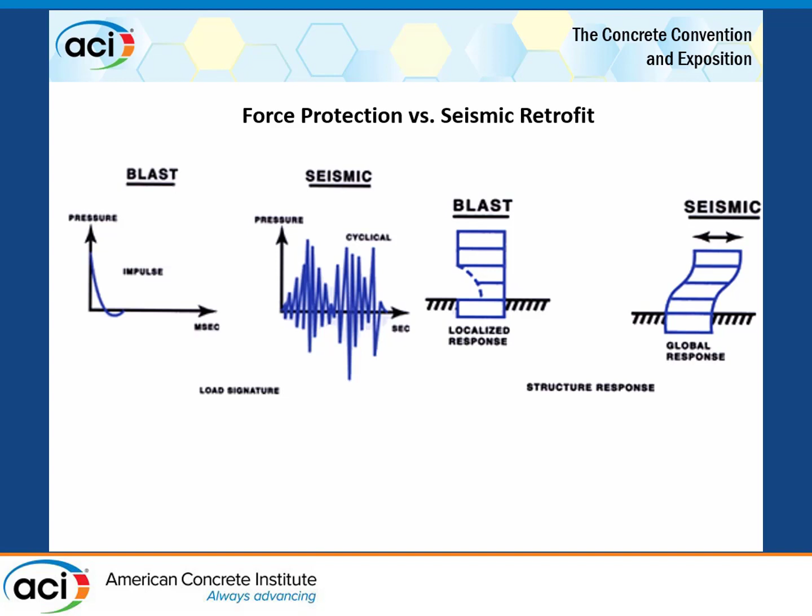What I've found over the years is that there's a fundamental misunderstanding still to this day of what the materials are. People have moved past and started talking about how to design them for shear and flexure and call them confinement, and I can talk about that till I'm blue in the face. But at the end of the day, there's still a real misunderstanding of what these materials are and how they behave with reinforced concrete or wood or steel or anything for that matter.

So as we've worked through the field of blast, we've dealt with all of these types of things, and what happens here is I have sometimes academia, but usually it's a consulting engineering firm, ring us up and ask, will this material provide a solution to my structural problem? And we have to talk about that. We have to talk about what exactly is the structural problem, and talk about what are your alternates.

At the end of the day, this industry doesn't exist unless you save people time and money. So I have to be able to show people, first, that we can solve the structural problem, and then second, that it's going to save them time and money compared to what they would have done, because there's more than one way to skin a cat. And at the end of the day, that's the name of the game. It's saving time and money. It's not research, no offense. It's saving people time and money.

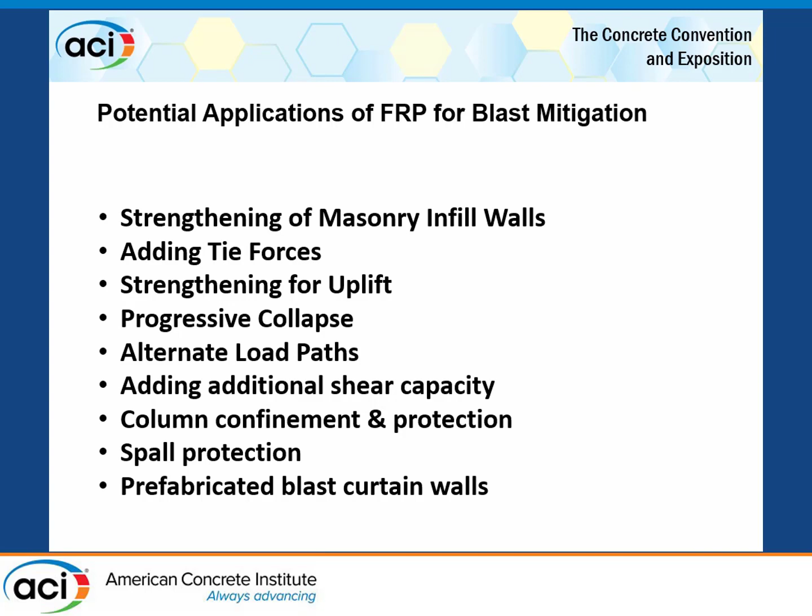So I have to take what's done in the laboratory and find practical purposes and bring those solutions to these clients who have owners that have to save time and money. By the way, I'm not going to read to people, it's just something I don't do.

So what I want to do is show just a quick comparison. This is actually just a comparative shake table test.

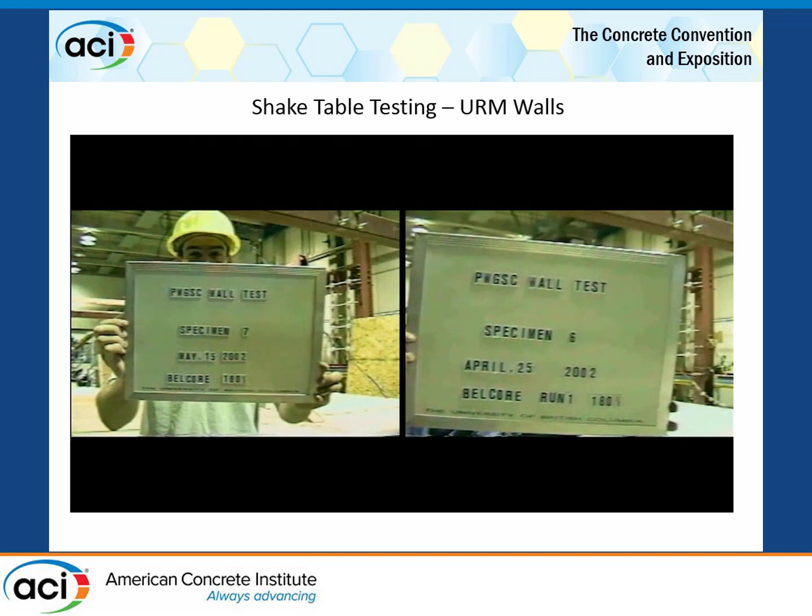This test was done a while ago, and it's very dramatic what these materials can do to a structure. Showing that to people gets them really excited.

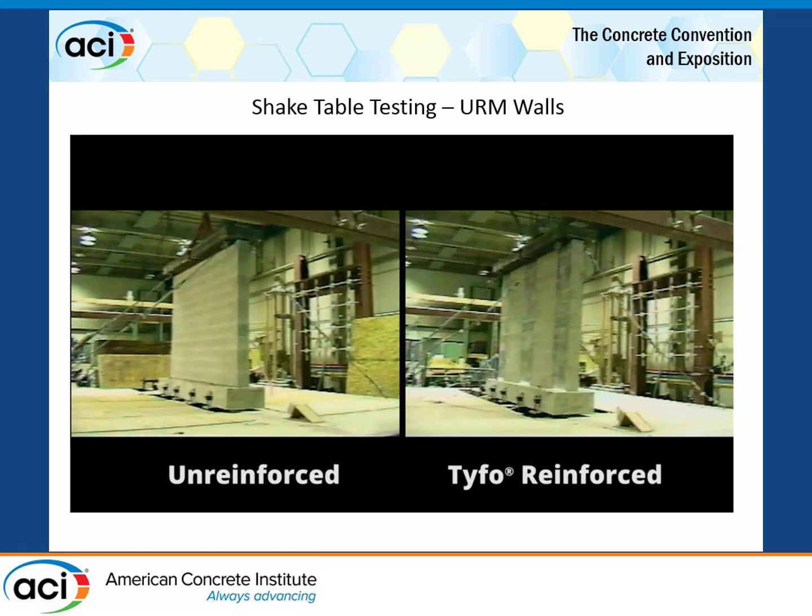This is an unreinforced, ungrouted CMU block wall with a mast that, thank God, is hooked to an overhead crane above—otherwise it would be a real problem on the shake table. Next to it is the exact same excitation event being hit on the table.

All we have here is one layer of glass. It doesn't even cover the entire face of the wall, and then we have glass anchors going into the foundation. Still, just a remarkable difference in the performance, and for very little cost.

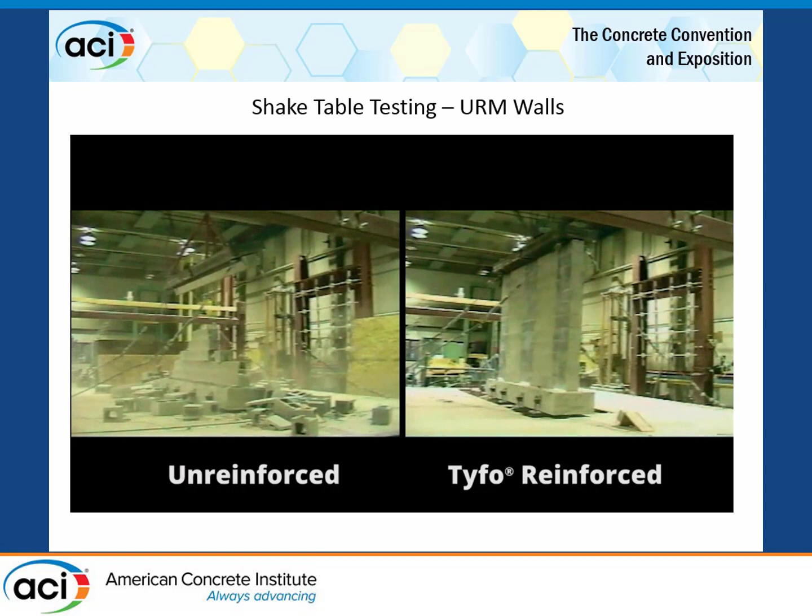For most of the time with blast, we've seen that these glass systems will tend to outperform the carbon system. Again, a lot of this you've probably already seen.

This is a test we did with BakerRisk back in the day. The glass is on here—I get a lot of confusion with that. You can see the grout lines behind the glass material. Glass is somewhat translucent when you saturate it, but it's there. You just got to trust me.

It's 2 layers of unidirectional glass, just spanning vertically, simply supported at the top and bottom. What you don't want to do is catch all that load and shove all that load right into your connections—the stiffer element you put on that wall, the more you'll do that.

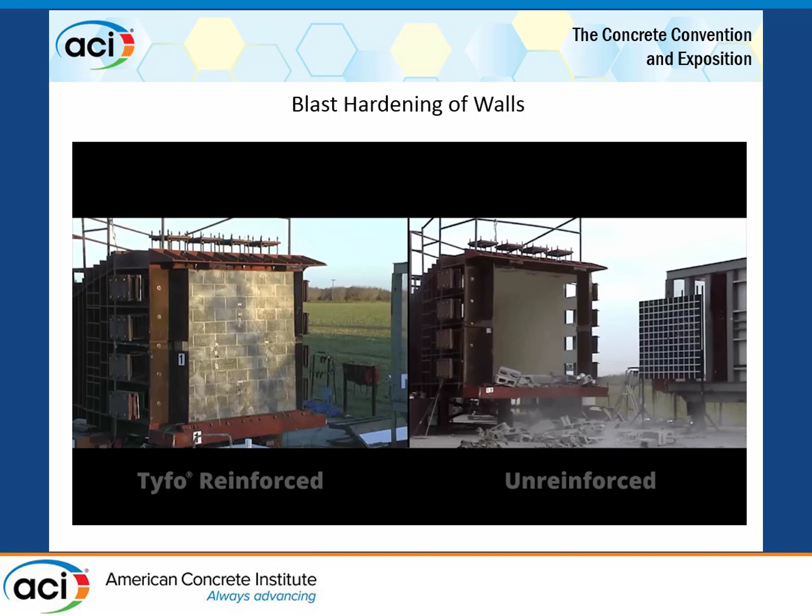By using the glass and its 2% ultimate elongation, you can spread more of the plasticity through the member and send less of that load to the joints. You don't want your joints to fail—it's a very bad day, as Zach was referencing.

When we had done some of these tests, we played with different amounts of coverage. So if you don't cover the whole wall, there's a danger of small pieces flying out and hitting somebody.

So although you may save some money by not covering the entire surface of the tension face of the wall, obviously you want to prevent small pieces from flying and hitting people. So we tended to go with full coverage. I just thought I'd show you that.

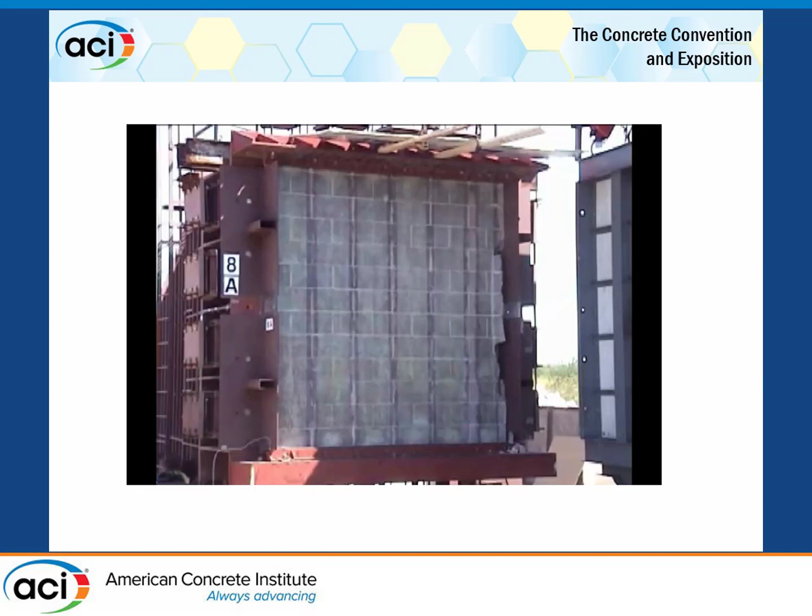Before I get into this—because polyurea has quite a bit higher elongation, it's not FRP, I also wouldn't suggest using it—I want to talk about elongation.

We use glass sometimes in blast events because its ultimate elongation is roughly 2%. By the way, that's true of everyone's glass, everybody's products. You should consider GFRP as having an ultimate of roughly 2%—it'll fracture. Same is true of carbon, except it's roughly 1%. So everyone's carbon, I don't care whose it is, product X, Y, and Z, 1% is the ultimate elongation.

I see a lot of confusion on this. There are people who talk about 1.8, getting close to 2%—they're talking about the dry fabric. You cannot do that with this material. Aerospace knows it, and yet we're screwing around with this all the time.

I see confusion all the time. When I talk about not understanding the materials, I'm talking about people citing dry properties, like 33,000 KSI modulus—okay, that's not this, that's not what's out there doing the work. That's this: close to 2% elongation. That's not this, that's not what's out in the field, that's this. And oh, by the way, your concrete and steel is trashed when you're getting that high anyway.

So when I talk to engineers about how you design FRP going into the world—I don't care whether it's blast, a seismic event, whatever it is—it's strain compatibility. That's what it is. You need to know strain compatibility with the reinforced concrete, the wood, the steel, the masonry, whatever it is you're putting it on and working with. You have to understand that.

And if you think this material has close to 2% elongation, you're wrong—that's a carbon system, it's 1%. People mess around with this all the time because you can tweak the equations that spit out results when you follow some of these guidelines that have been created. I'm not a huge fan, because the guidelines have to improve.

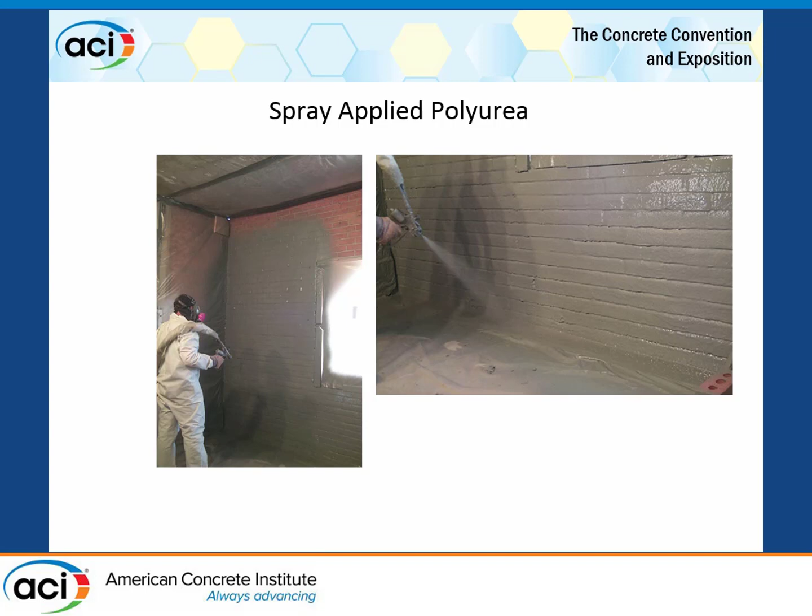Polyurea sounded good, very high elongation, pretty awesome stuff. You can put it on walls, and it looks great—right up until you try and install it. You realize about 20 to 25% debonding should be expected with almost all polyurea applications. 20 to 25% of the area you should go ahead and assume you didn't install it right, didn't debond, or didn't bond properly to the substrate.

And it's hard to get it on right. It's hard to get it on at the right thickness. It drips. It's really hard to control.

And then we kept getting these questions about fire, so we went ahead and did an E84 test, and we almost blew up the lab. Turns out polyurea at the right temperature is the opposite of safe, so I don't suggest it. We don't sell it anymore.

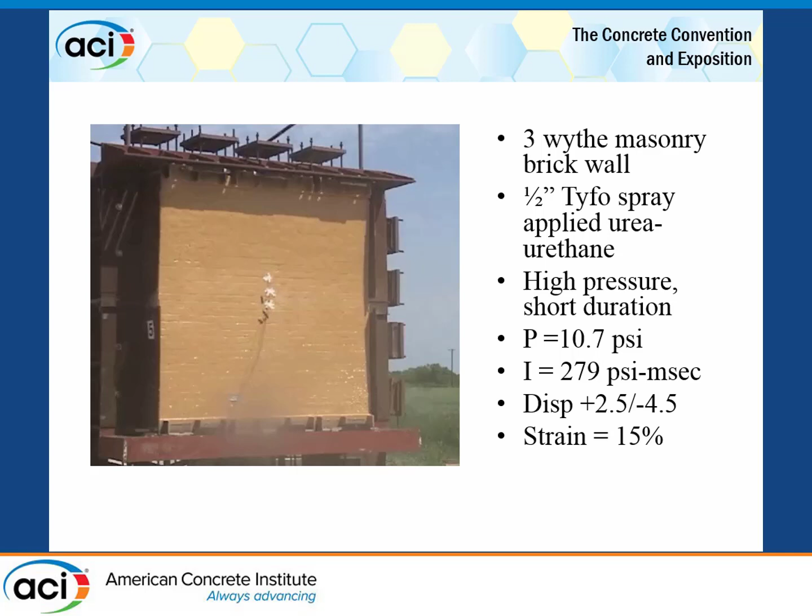Saw this slide earlier. I just like the tyforce method because when people start talking about it, the retrofit looks exactly the same. It's super simple. I like it. When can you use it? When can you not use it? That's on you, I don't care. It's the UFC. Study it.

What I want from the designer, I need a design engineer to be very clear about two things: the capacity of the element and the new load demand, and the dimensions of it. You're liable, as the engineer of record, for those things—the capacity of that thing, the new demand from whatever the blast event was, and the geometry of it. That's all on you. At the end of the day, we at Fyfe, and through our applicators, our certified applicators, are then liable to pick up the difference, which we help them clearly define on the bid documents.

What I don't like is that through this misunderstanding, fundamentally, of the materials to start with, and then how they're used, I see bid documents at the streets that are very apples and oranges. My job over the 25 some odd years has been basically trying to get these bid documents to be apples to apples. I think all of us as engineers would agree that when it hits the streets, it should just be apples to apples. And getting that to be true is very difficult.

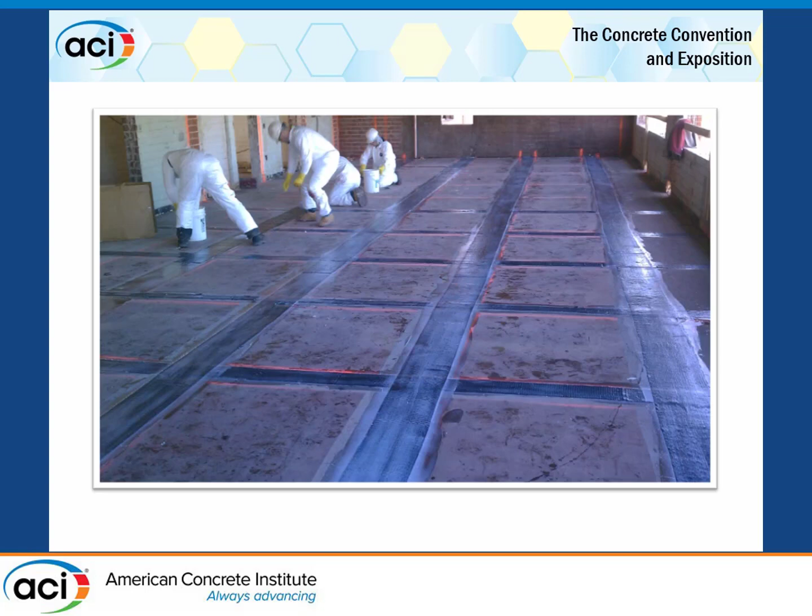I want 50 kips of tension in that element and design it for ACI 440—okay, that's apples and oranges. It's not the same. And I can show you the gray areas, but it takes a little time.

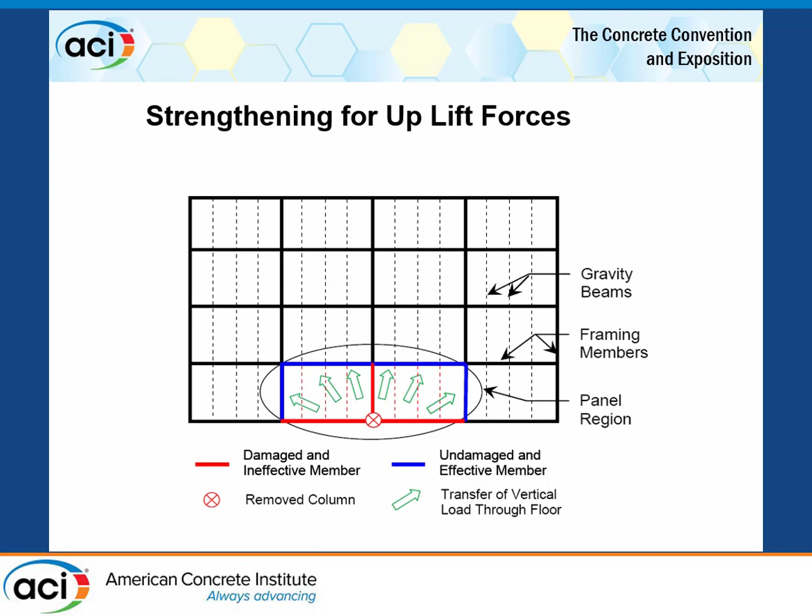You've seen some of these. Sarah, thank you for the work. This was actually originally with UT Austin, I think, we started, and then In-Sung Kim picked it up, and Wassim Ghannoum picked it up, and I don't know if Jim Jirsa is around here—I saw him, but he was retiring, so I don't think he came out. But early on, working at UT Austin, we learned a lot.

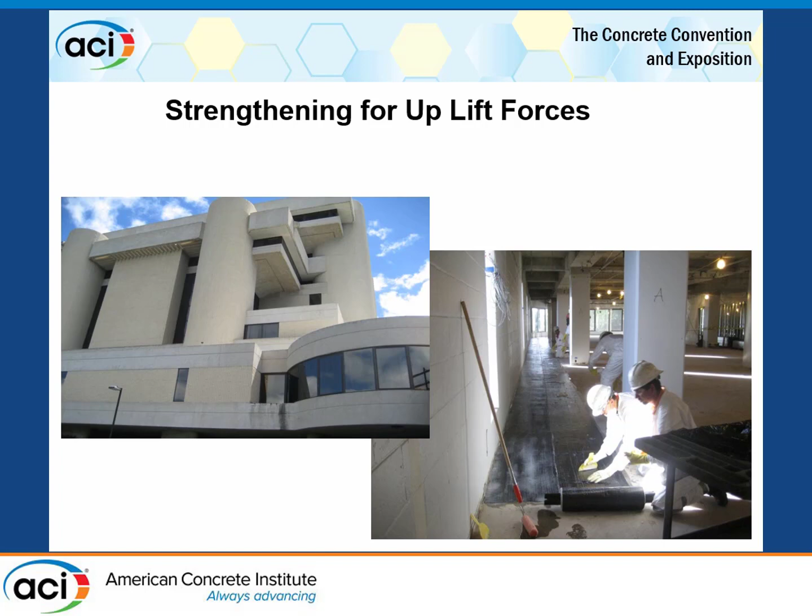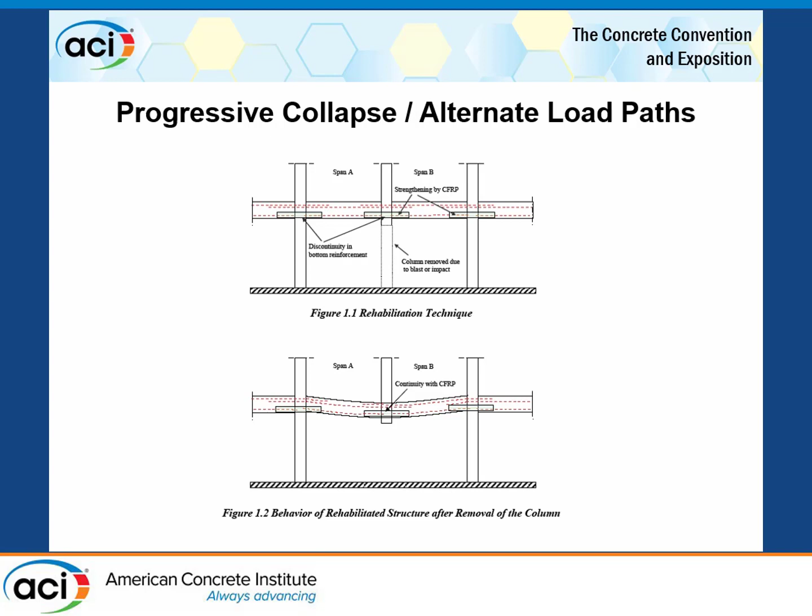In practice, this is one of the projects we did. It's a courthouse out in Oahu, and the problem here is discontinuous top steel in the slab, basically, and we're just creating that continuity. What we see here, and from Dr. Orton's early testing, was that when you have discontinuity, whether it's in your bottom steel or in some cases your top steel, creating that continuity through the use of these materials can be doable.

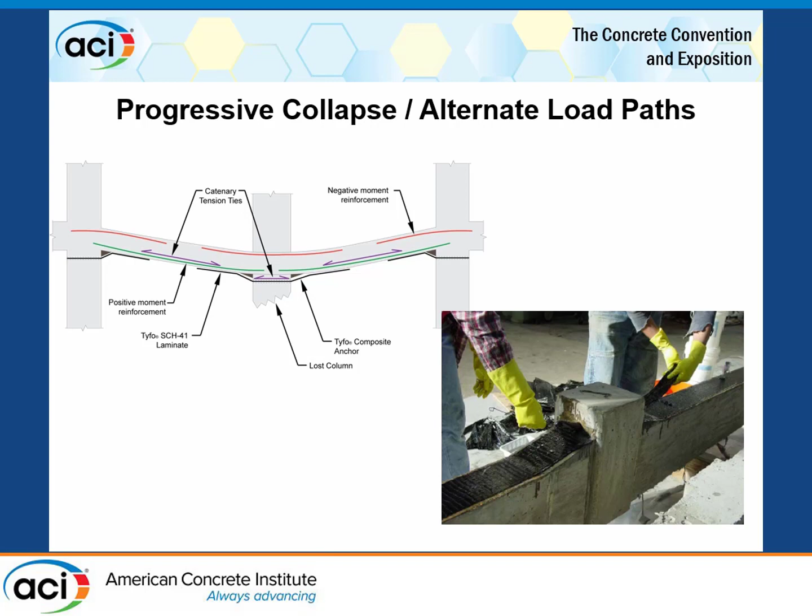What we find is the geometry is a pain in the butt. You see here, it's a small scale specimen, and we're drilling through and sending anchors through. Very tricky, the geometry of how that joint is formed in the road, getting to it and getting access, and really making this work can be quite complex. Quite honestly, a lot of times when we've seen things like this, we've had to suggest they take a different method, use reinforced concrete or steel or something else. You have to make sure that the mechanics work.

I don't know if Austin showed this yesterday—I wasn't able to make his talk. This is at UT Austin, very interesting testing that was done. If you bond three-sided to a beam for shear, the mode of failure will be debonding. The question is, when does it debond? So you grab your 440, you go through your K factors, you figure out what the debond stress is going to be.

All right, I'll ask you this: did they prep the concrete the same there as they did there? Is the concrete property the same there as it is there? Have you ever been to Quebec and seen the concrete?

How confident are you in that debonding strain that you empirically came up with? That will almost always govern what this can do. However, this did not fail by debonding. So look a little closer. This failed at ultimate - the carbon's fractured.

What actually happened was when you read the dilation strains, with a load there and the support there, you get a dilation strain of roughly 0.004, 0.005, 0.006, and that shear crack gets just wide enough that you lose your aggregate interlock. You lose your V sub C component, and it goes from 0.006, boom, to 0.01, and bam, it breaks, and it debonds very fast.

So really, I would argue the ultimate here to design would be about 0.006 based on the crack width, essentially, and that's true of columns as well.

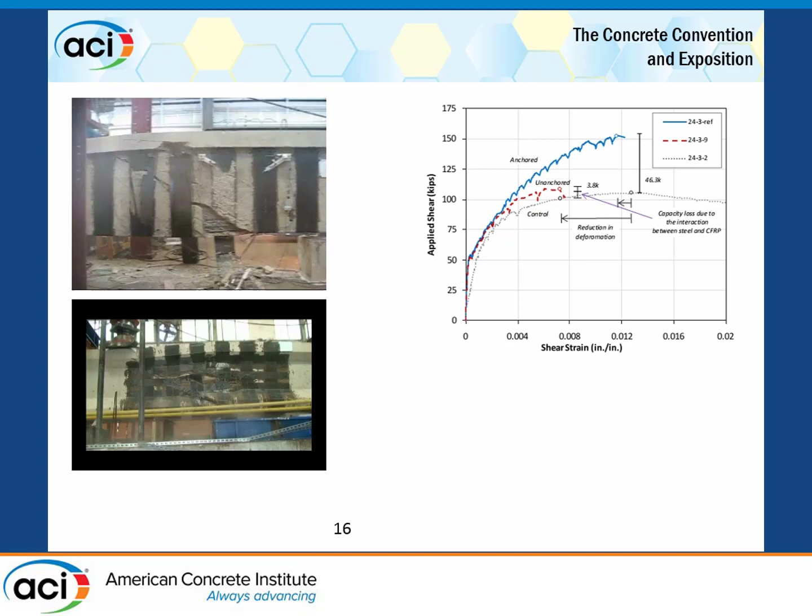What I can tell you is through this testing, I can now remove debonding as a mode of failure. If I'm allowed to design it the way we want, based on the testing that we've done, debonding will not be your governing mode of failure. We can literally remove it.

This was completely debonded on purpose. The only thing we had is a three-sided and then fully anchored, and we actually performed much better than I expected. I would still, by the way, suggest that you can treat it as a bond-critical application and still bond it, but we wanted - this is fun to do in a lab - to completely debond it.

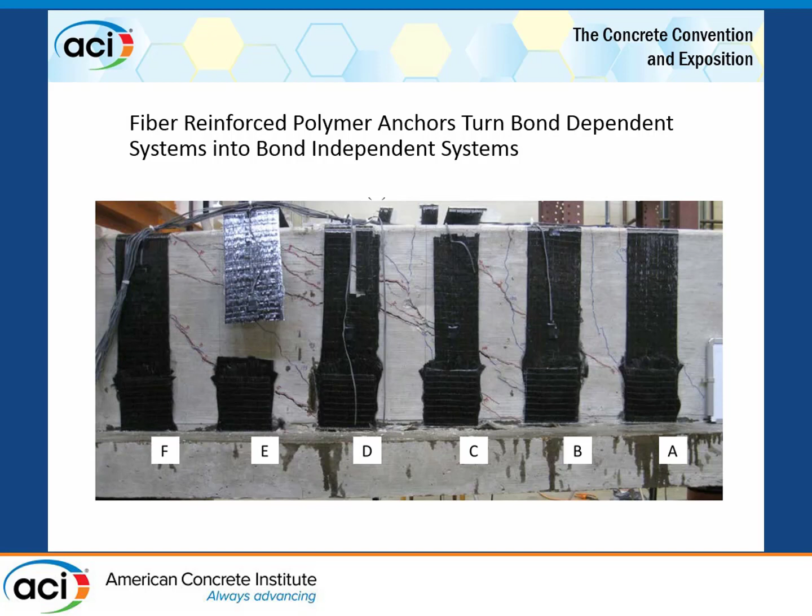I wouldn't necessarily suggest that at this point in time in the real world. But we did prove, in fact, that you can take debonding out as your governing strain, as long as you detail it correctly. And that's a longer conversation.

You can improve the performance of walls. We did quite a bit more wall testing with and without anchors. The detail you see there with the beam is more or less what we tested at UT Austin.

Whether you go straight in or whether you angle it, six for one, half dozen for the other - but in terms of where you drill the hole, you can't drill the hole all the way up against the soffit if you go straight in because of the dimensions of a drill. You're going to end up 1.5 or 2 inches below the soffit. But if you slightly angle that, you can get the hole right up at the top, closer to the compression zone. I'm trying to get my tension member up into the compression zone.

It's very similar to struts and ties and what we already learned about, right? And this can substantially improve things. Basically, you can start designing these, if you can justify it through your tests and what you've done, the same way you would design a fully confined column.

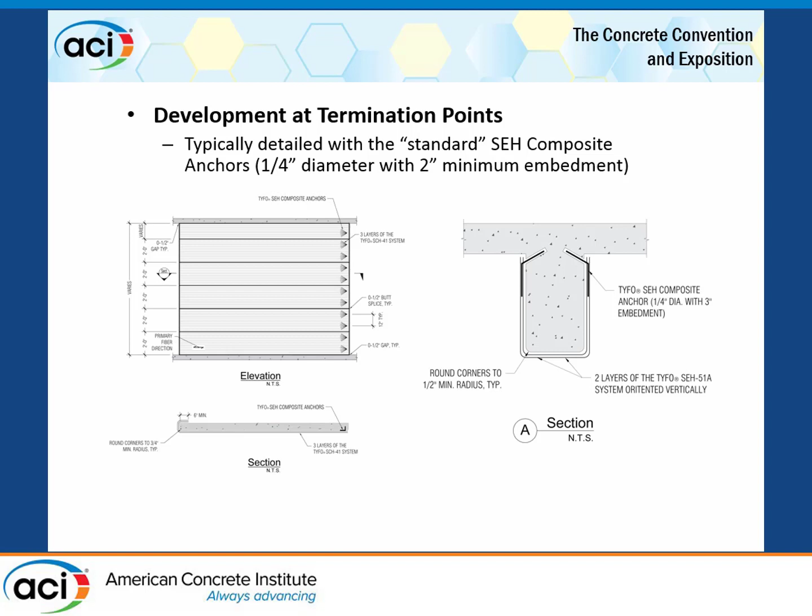We've also run anchors right through the slab and all the way around and done some different details with that. This is one of the tests that we've done - notice we are using glass. It's kind of neither here nor there.

But the idea, and I get the question a lot, is when do you use glass and when do you use carbon? You need to achieve a performance goal, and you need to do it at the least possible cost.

So it gets back to when to use glass and when to use carbon. Check it, run the numbers for both, go to your contractor, talk about it, figure out what's involved. And guess what? The glass might actually be less expensive, and you might not need carbon. This is an example of that.

I just want to show you how our anchors are installed. There's some differences in this concept, but again, the hole is drilled as high up as you can. We fill it halfway with thickened epoxy. We take the pre-saturated anchor, push it into the hole, fan it out, take that same thickened epoxy, butter it up, and then take a second layer and sandwich it. So the anchor is actually between the two layers of glass there.

This worked very, very well. We've done it on multiple tests. Yeah, what can I say?

Oh, by the way, just so you don't get confused, the red there, those are just threaded rods on the test specimen. I get a question on that every now and then. It's just threaded rods sticking out of the test specimen. We just taped it with red duct tape to keep the epoxy out of the threads, because you don't want epoxy in your threads. So that's what those are. And again, they've already prepped the surface and primed it. That's why that looks wet - it's just wet with the primer epoxy.

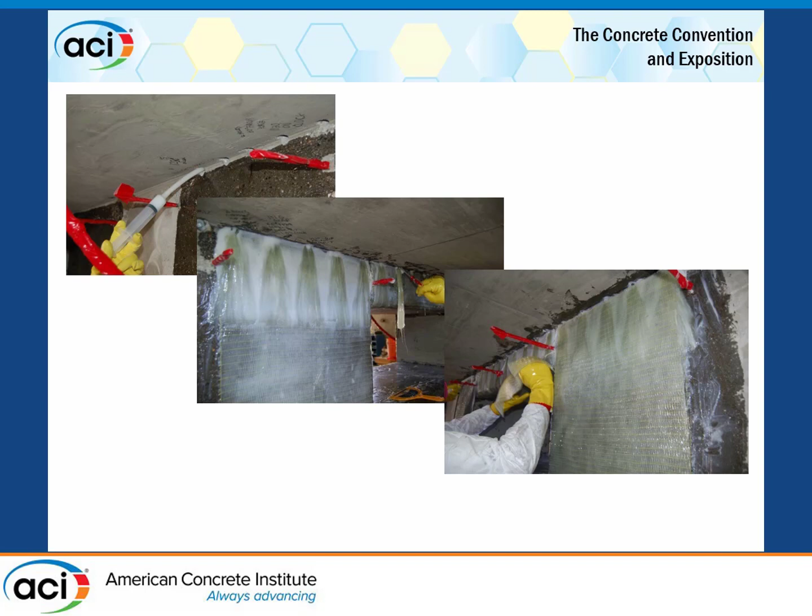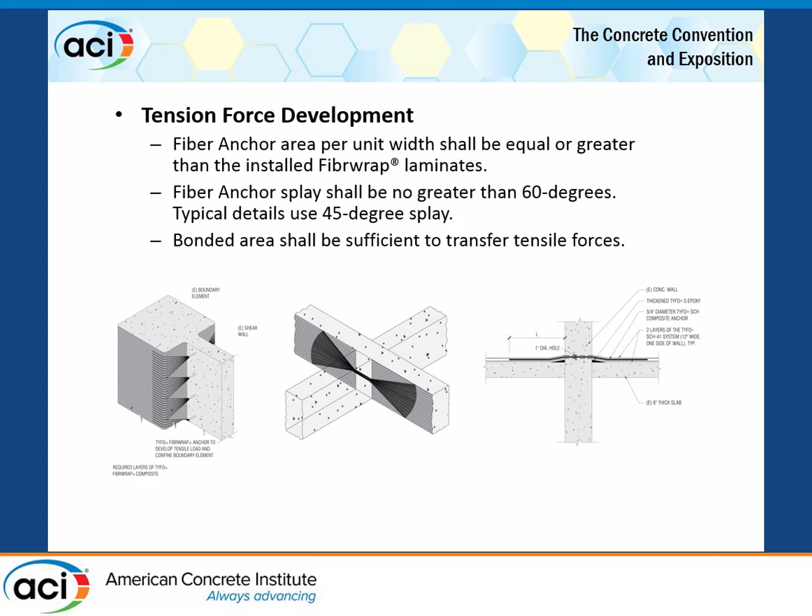So we've done a lot of different tests. We've used this for a lot of different reasons: confinement of boundary elements, just tension going through obstacles. More often than not, these will be carbon when you're quantifying the tension force you want to transfer through something or into something, like embedded connections. If you're improving the detailing at, say, termination points, we'll often then go to a glass anchor. It's a lower modulus, and can actually be better while working with concrete.

Here's some pictures that probably everybody and their brothers use. This is from out in White Sands in early days, working back and forth with UCSD and others, playing with large bombs. But you've already seen a lot of this on columns, so no sense repeating it. You get the idea - at the end of the day, we want the event to come and go and the column to be able to take its axial load so people can walk out of the building.

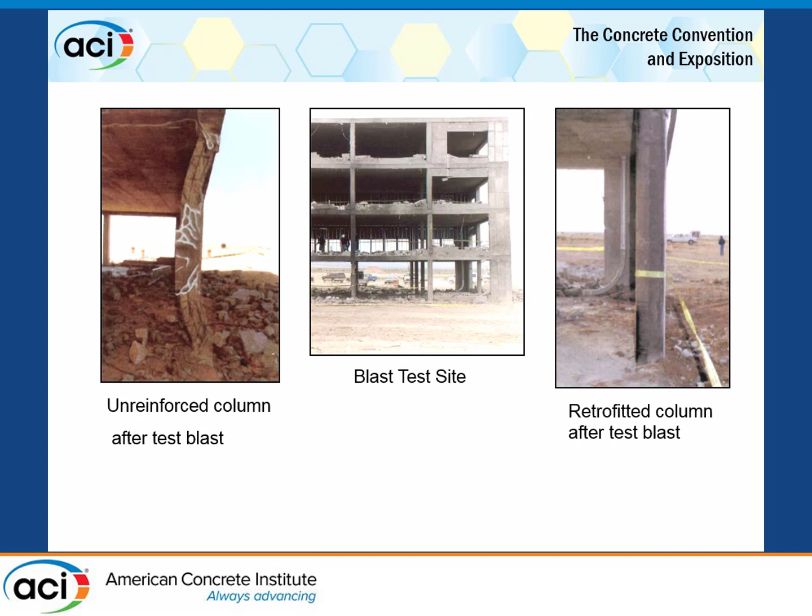I mean, that's it - you might need a new building. But at the end of the day, as structural engineers, I want to be able to take these events and sustain life. But you've got to expect there will be failure. I think the best thing we can do as engineers is control where it fails, how it fails, and at what displacement. So this is some work done by Karagozian and Case.

Pretty cool stuff, pretty cool pictures. I'm not a huge fan of FEA because it's pretty cool pictures - great to sell to clients, works awesome, it's pretty impressive. But if you don't correlate it with actual testing, I have a lot of holes to punch in it. Don't get me wrong, it's a valuable tool - when repeated, I've seen it, so it is valuable. But there's a reason we do structural testing. If it was as great as a lot of people think it is, we wouldn't have structures labs. The reality is you've got to correlate that with real tests.

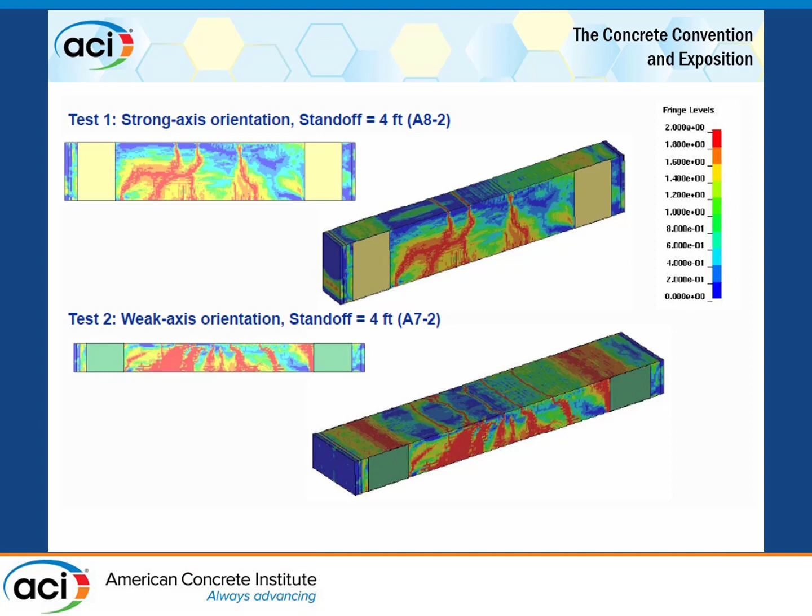So this was done - Zach showed a little bit of it. He was intimately involved in this project. As we zoom in, I liked your slide, Zach, talking about the different overlaps and butt splices - a butt splice here, an overlap here, how far of an overlap.

How well do you detail the seams and edges? I remember after this test, one observation was that we should have put more thickened epoxy over all of the exposed surfaces.

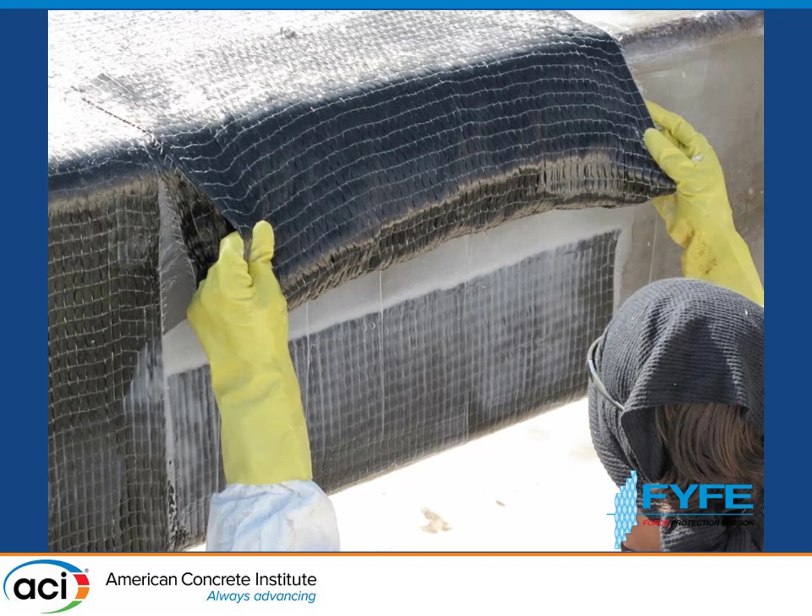I think we got another picture here. Oh, look at that guy. Look at that guy. Anyway, I was going to give you a sunburn joke, but I'm going to move on.

Hold on, let me play this. It's stuff that some of you may have already seen, but this is a close-in blast test. Specimen's way over there.

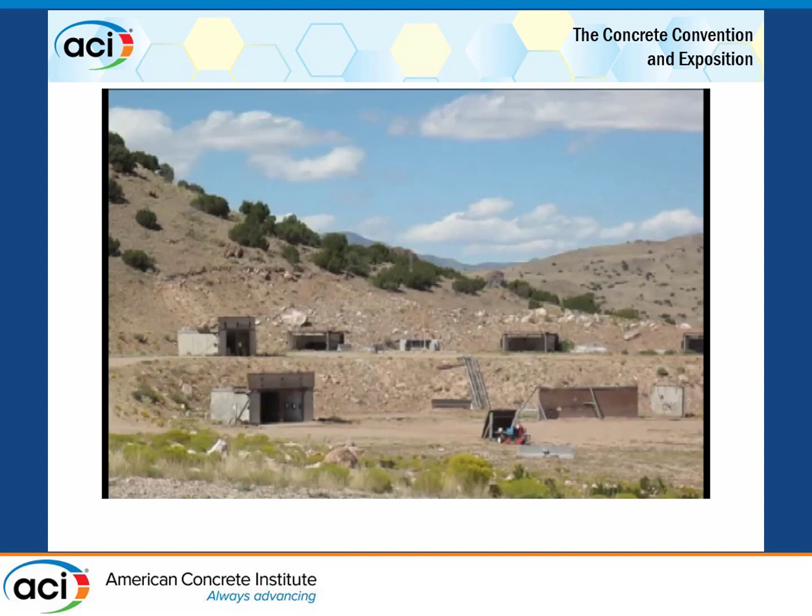There's a bomb, and there's a specimen. So pretty cool. I actually didn't think it was going to work. I was a pessimist. I didn't think it was going to work at all.

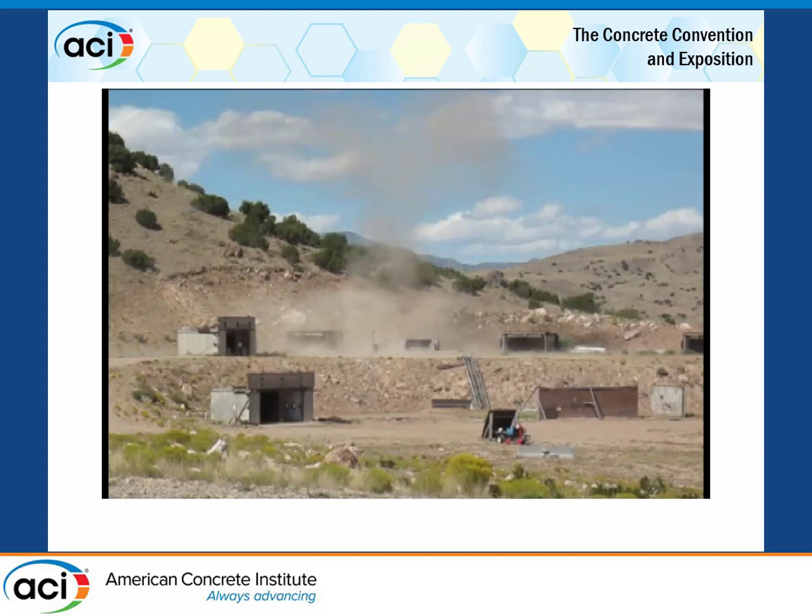When we looked at it, we were observing that, oh my gosh, in the areas where we had... it's really important for every single project to provide shop drawings. What I explained to our engineers, when our contractors call us up and we've looked at the bid documents and won the bid, great, we always send out shop drawings. I'm never going to have a crew working off of the actual bid documents that were originally made because they never have all the details you need.

Where are the butt splices? Where are the overlaps? How do you deal with the corners? How do you finish it? Two biggest things: surface prep and finish. It's bond critical. You've got to get all the way to your substrate. You can't have non-structural coatings. A lot of people want to have non-structural coatings and bond to it. Trust me, it's not what you want to do. We've seen enough in our testing to know for bond critical applications, it's just that.

Surface prep is your number one thing, and your second one is going to be anchorage. And then again, don't forget finish. In this one, had we put that thickened epoxy not just at the seams and edges, but over all exposed faces, it actually would have done a lot better. And we saw that. I don't have a great picture but as you were showing here, it was like, oh yeah, I remember that. So a detailing thing for close-in blast: hit all exposed surfaces with a layer of the thickened epoxy, and then come up and put your pretty cladding or whatever it is. But make no mistake, I say pretty cladding, it sounds kind of quip, but the architects carry the ear of the owner, and you will have to deal with how this looks. And as I say, surface prep and finish, don't forget finish. It makes a huge difference.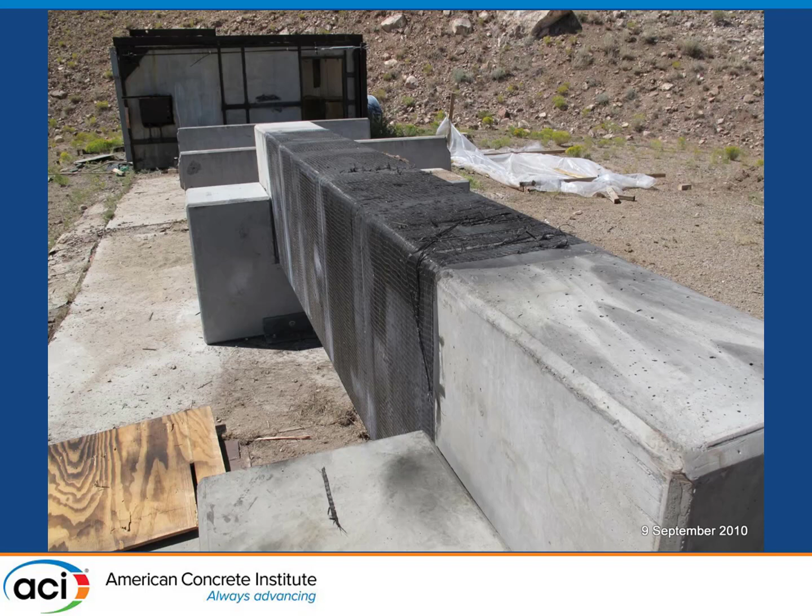Who's going to be touching this? The public. How close do they get to it? What's it going to look like? As an embassy in a very volatile part of the world, I hear they're going to move the embassy. That's about all I can say about that.

There's Zach again. Look at that. You got shorter. That's good.

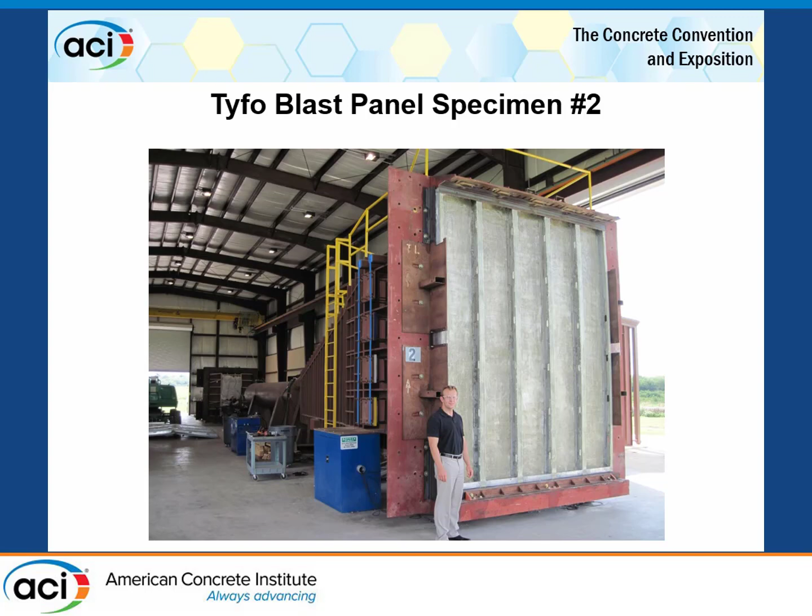Sorry, anyway, this is again working with Baker Risk. We worked on basically a macho curtain wall. I don't know how else to say that. It's a prefabricated curtain wall. We designed it specifically to take certain blast loads. I didn't want to put all of my videos and things in here, but it's a little bit heavier, and it combines a little bit more concrete on the compression side and a lot more tension on the tension side.

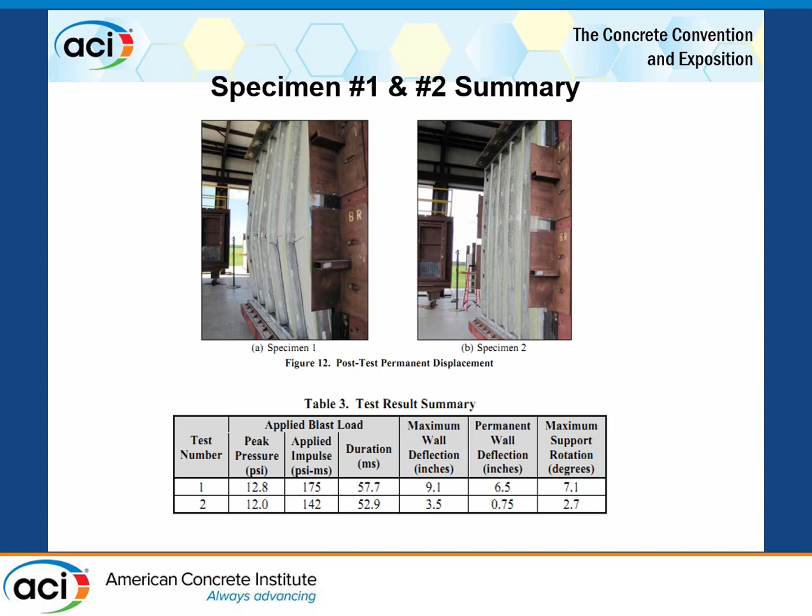And at the end of the day, we've done a whopping one project. This is an air traffic control tower that we worked on. These are the panels getting installed. Again, new construction in fiber reinforced polymers is in its infancy.

To some degree, retrofit and repair... I mean, here I am over 20 years into this. Had you asked me 20 years ago where this industry would be, I would say every engineer would be designing it comfortably, every contractor would be installing it comfortably. We're not there. We're nowhere near there. It's still very much specialized. I see a lot of confusion in the industry, and again, before people start jumping into their equations, they're literally confused with the material itself.

And I've seen this from all walks of people in the industry. There's a lot that we learn from trial and error. There's a lot we learn in the laboratory. There's a lot that's learned in the field. And I just can't express enough how important it is to try and pull all that together. Take very seriously what the contractors in the field are telling you.

Take very seriously what the people in the laboratory are telling you, but you need to be able to merge that with practical reality. Over the years, I've found it's a very tricky thing.

Although I think this is a great product, I don't see it being used that much because of everything it takes to get it to market. You have to come in at really early stages with an engineer to talk about how they're designing their steel moment frames before this will even happen, because you could use precast or other ways to build the structure. It's clever, it's cool, it gives you more floor space, but it takes a lot of work.

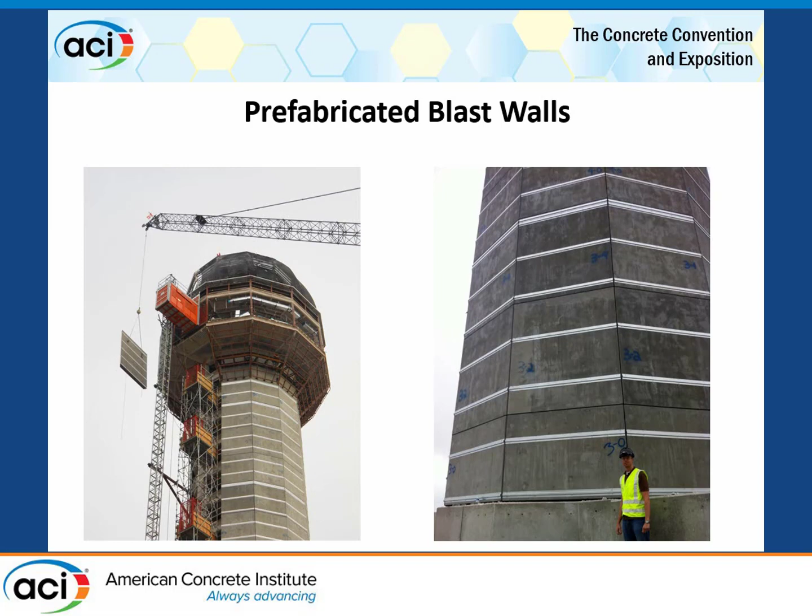So our focus has been really just zeroing in on the manufacturing of the product in a consistent fashion, going from a mom and pop company, as it were, to corporate America. There's some pros and cons with each. I've learned mom and pop very, very well, I think. Now we're in a corporate environment.

Aegion's a billion-dollar company, and what I like about it is that I no longer have to even think about quality control. As we expand and grow, I don't have to worry about it. I really worried about it a lot when we were a mom and pop company, but not anymore. We're ISO controlled, it has to be transparent, we have stockholders to answer to, and that's handled - there's whole departments to deal with it. So I can focus on what I like to do, which is talk about people's unique problems and see if this can be a solution for them.

Again, working through the years with various professors, I'd welcome your comments, input, and questions, because I think where the rubber meets the road is testing it and proving it. Over the years, the hardest two things I've had to deal with are predicting its performance - prove that you can predict its performance, don't throw me a booklet or a guideline or a code, prove it - and the next one is how long is it going to last. This is a big one. The hardest question I ever got was, what's your warranty?

And I usually just for fun like to ask the group, do y'all know what warranty you get from your steel suppliers? Anybody? Anybody get a warranty from your concrete suppliers?

You design it for 50 to 100 years. This is not a coating, this is not a waterproofing membrane, it's a structural member - it comes with all the liability of steel. You cannot get a 20-year warranty. This is really, I don't know why it's confusing - you can't do it. You can't get it from your steel supplier, your concrete supplier, and you can't get it from an FRP. And if you get some weird warranty, it's probably not worth the paper it's written on.